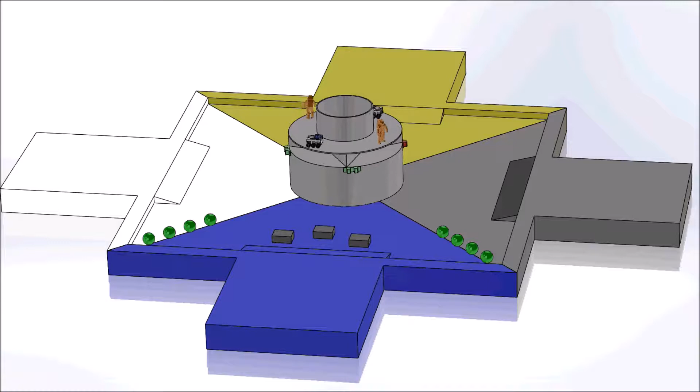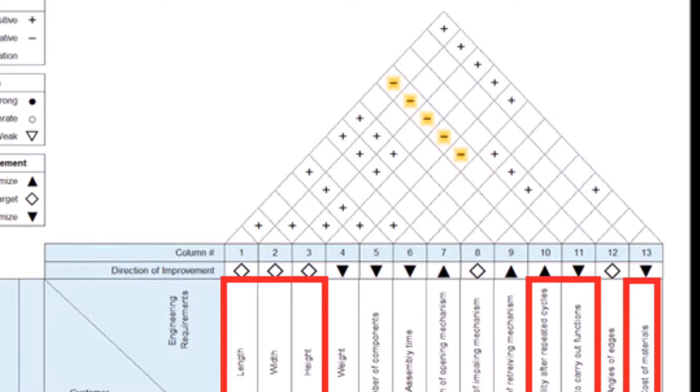This is our house of quality that we use to evaluate what design goals best corresponded to customer needs. The most important engineering requirements were the length, width, height, functionality after repeated cycles, time to carry out functions, and cost of materials. The length, width, and height were constrained to fit in a box that was 12 by 24 by 18 inches.

The functionality after repeated cycles was important because the machine needed to perform all its tasks throughout the competition. This also needed to be done in a timely manner, as we were competing with other groups for the astronauts in the center. Finally, the overall budget was $100.

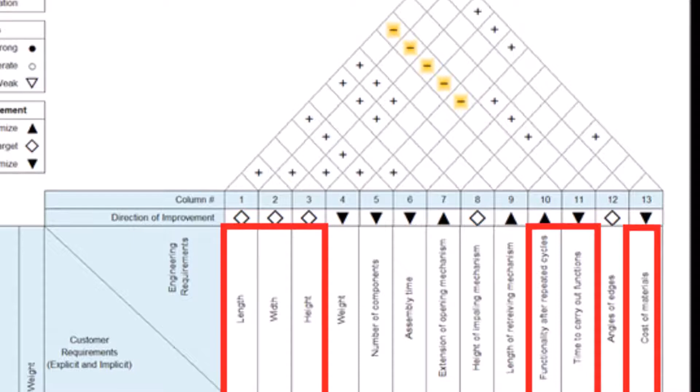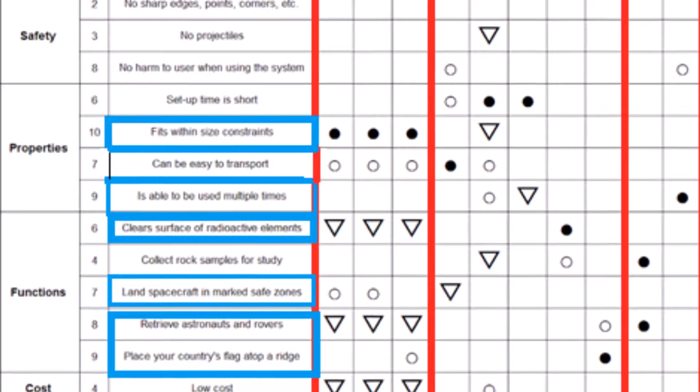The most important customer requirements were fits within size constraints, able to be used multiple times, deposit spacecraft, retrieve astronauts and rovers, and deposit the flag. This was due to the fact that, in order to compete, it had to be able to run multiple times while fitting in the size constraints. Also, these tasks were worth the most points, with the flag being weighted the highest.

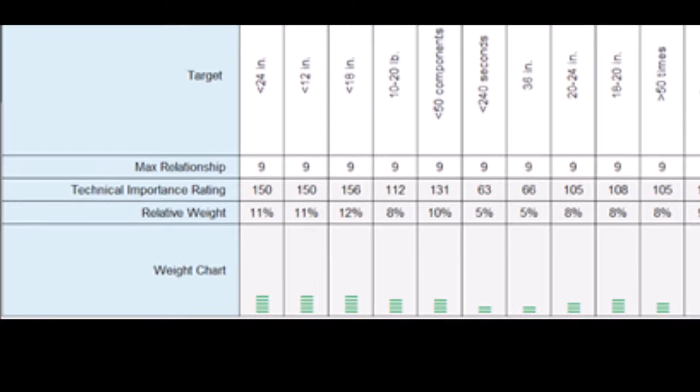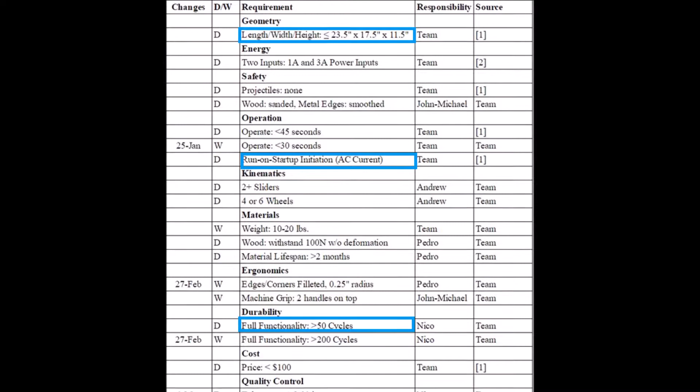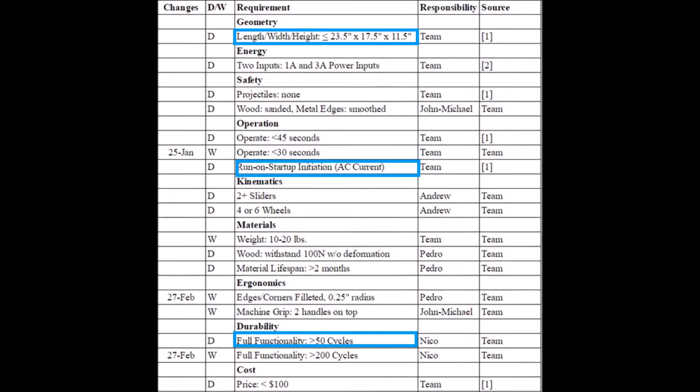This was our specification sheet. The 3 most important categories were run on startup, the size constraint, as well as being able to run for at least 50 cycles. This was because if our machine failed to run on startup or to fit in the box, we would be disqualified in the competition. Further, if our machine wasn't able to run repeatedly, we wouldn't be able to compete in the competition and win.

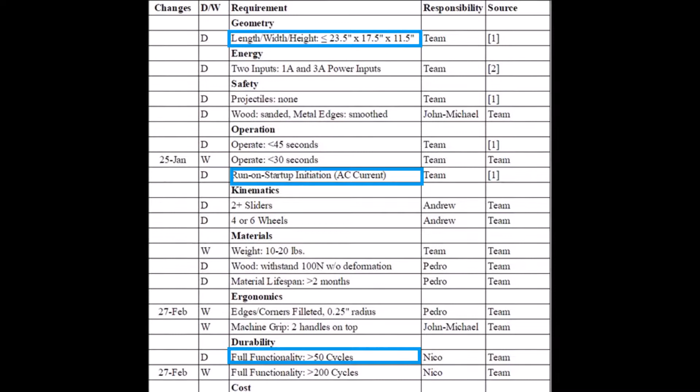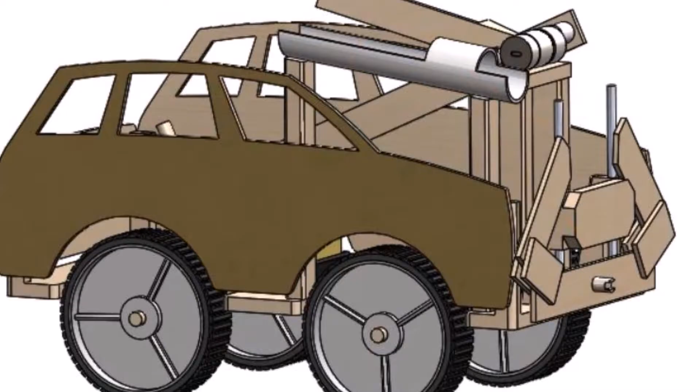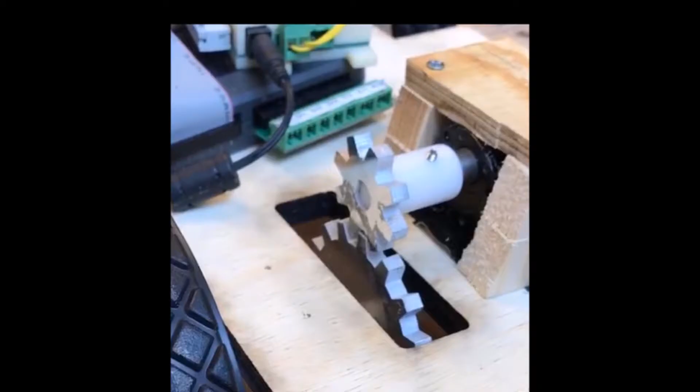We selected our Mars rover concept for our final design. This design was able to perform 4 of the tasks: deposit spacecraft, deposit flag, collect rocks, and collect the astronauts. The first subsystem of our machine was a 2-gear drive that drove the cart forward. Using 2 water jet aluminum gears, we used the small gear to drive the big gear, which was connected to the axle that drove 4 lawnmower wheels, allowing our cart to go forward. We chose rear wheel drive because when our cart was returning back up the ramp, the drive being in the back made it easier for it to get up the slope.

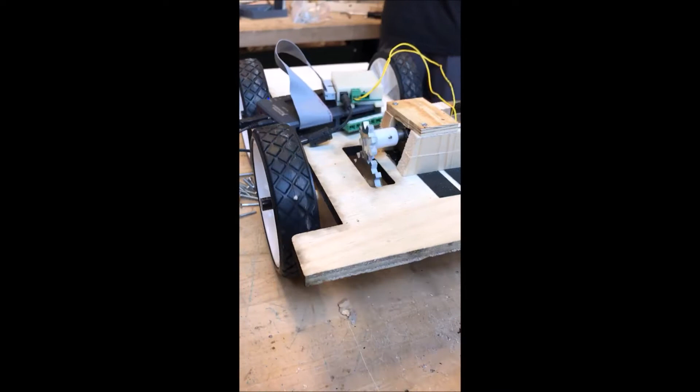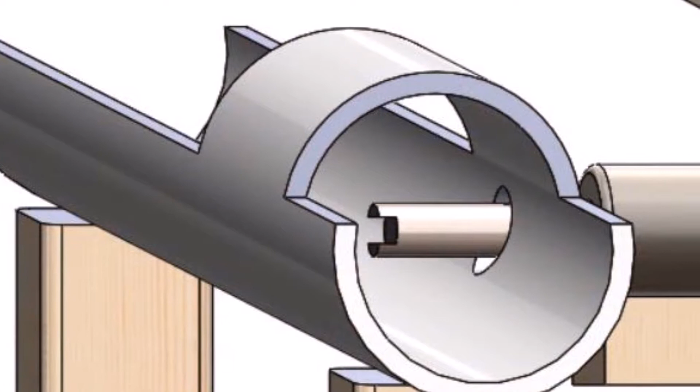The next subsystem of our design was a tube that held the spacecraft. We used 2 long arm switches that, when both pressed down, caused the solenoid to retract and release the spacecraft. Our next subsystem accomplished 2 tasks in one. It was a lever arm connected to the motor, which rotated around to drop the flag as well as collect incoming astronauts and rovers. Our final subsystem collected the rocks. It was a gate mounted on a solenoid that, when the solenoid was retracted, dropped and allowed us to drag the rocks back into the home zone.

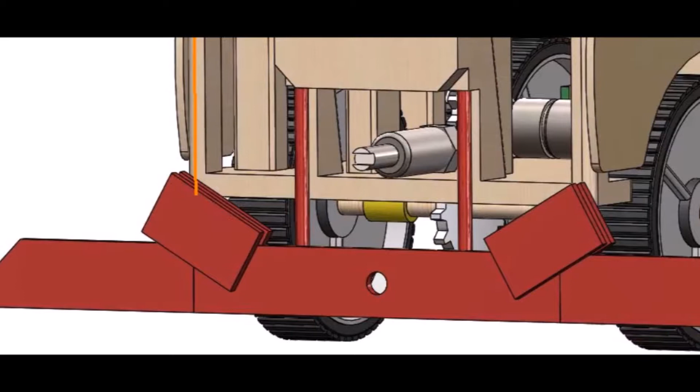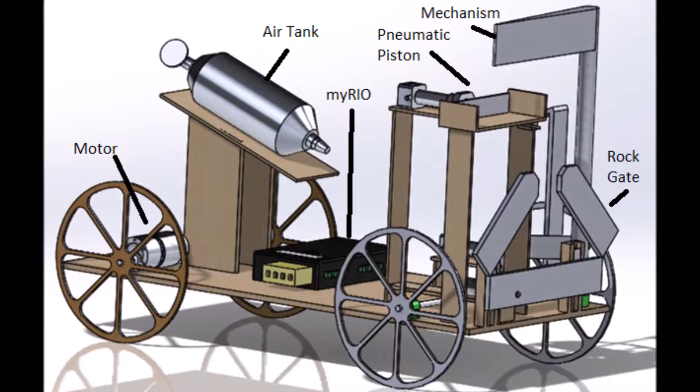We also considered a few alternative designs, the first of which we called Hot Wheels. This design featured 2 motors driving the wheels, a pneumatic piston to push the spacecraft in, a rotating arm to block astronauts and deposit the flag, and a solenoid drop gate. The pros of this design were the reliable and safe deposit of the spacecraft, as well as the solenoid gate. The cons include using 2 motors to drive the wheels, making it difficult to drive straight, as well as an unreliable mechanism to catch the astronauts and rovers, and no ability to hit the tennis balls.

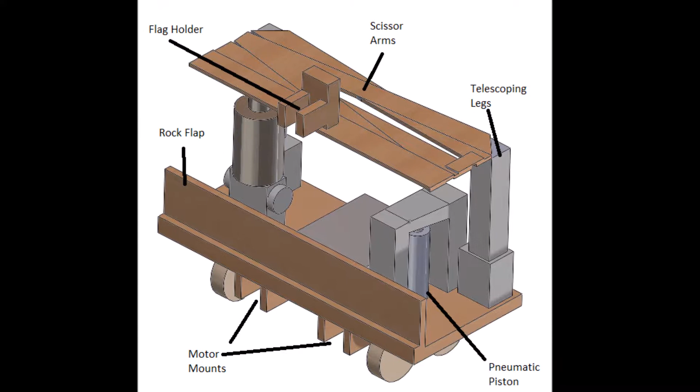Our next design was called the Extendo, unfortunately. The pros of this design were due to the unique scissor arm design, which allowed placement of the flag and collecting the astronauts and rovers quickly and easily. The cons were that the motors mounted below the cart to drive the wheels led to issues in collecting the rocks, as they would interfere as the cart moved over the rocks.

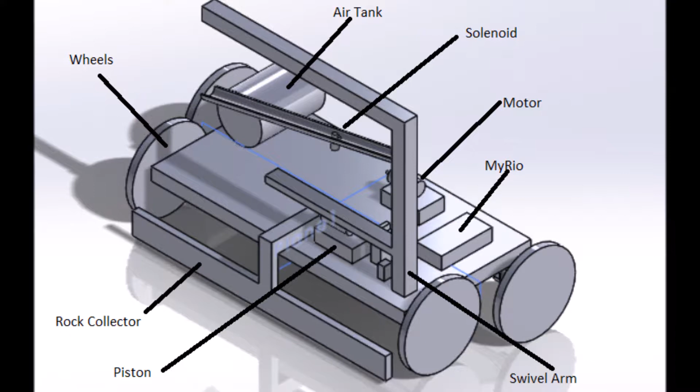The third design was called the tractor. The pros of this design were that one mechanism was able to complete 4 different tasks. The arm featured a solenoid-powered rover depositor, as well as an arm to swing out to hit one side of the tennis balls, and also to collect the astronauts and rovers and place the flag. The con, however, was that this design also featured the 2-motor drive system, which made it difficult to drive in a straight line, as well as having a source of unreliability in the swivel arm that would struggle to be consistent.

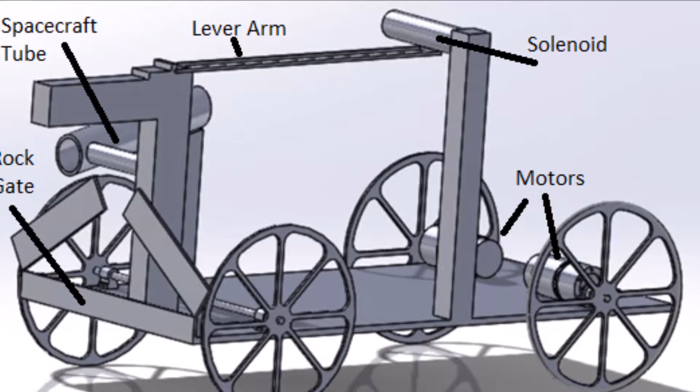Our final design was called the Model T. The pros of this design included a good rock collecting gate, as well as a consistent way to deposit the spacecraft. The con, however, was that the lever arm which would place the flag and collect astronauts was powered by a mousetrap, which led to inconsistency, as mousetraps are unreliable and prone to breaking.

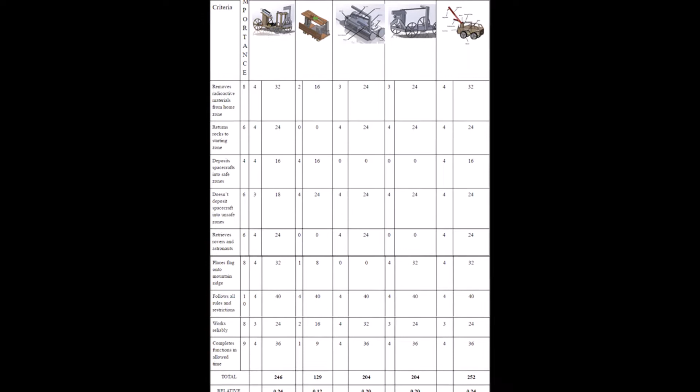After considering all our designs, we settled on the Mars rover for our final design, as it received a score slightly higher than that of the Hot Wheels design, 252 to 246. We also valued the reliability of the gear drive mechanism and flag placement mechanism. Further, we felt that the lawnmower wheels would be more reliable than the laser cut wheels featured in Hot Wheels and many of the other designs.

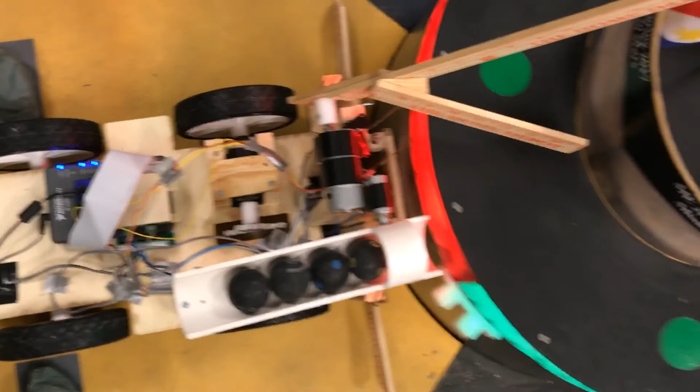We ended up getting the 57th seed in the qualifying round, out of 61. This was the result of 3 scores of negative 48 points and 1 disqualification. However, we were able to turn it around in time for the competition, as we ended up advancing to the 3rd round after placing 1st and 2nd in the 1st and 2nd rounds respectively.

We were able to win the 1st round due to a tiebreaker, as we had collected a rock while the other group had gotten an extra rover, with the rock being used to break the tie. Overall, we were satisfied with our performance in the competition with our revolutionary design, but we had been hoping to advance further into the competition.